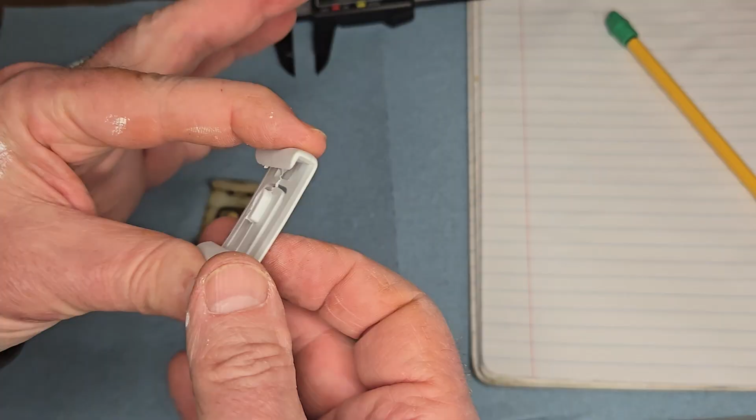But anyway, the other thing is these are extruded plastic. And when I put the other one in, it broke. It's very brittle. I don't say very brittle, but it's somewhat flexible. But in the course of putting it in, it broke. So it doesn't really make me think that it's very resilient, because obviously these are bushings that go on the bottom of the seats. You've got your body weight pushing down on this, and it's going to slide back and forth. So how resilient can something that brittle be?

So I decided that it might be a good idea for me to make a model of these and 3D print them in nylon, PA6, the nylon extruded 3D printing material, to make it a little bit more resilient. So what I'm going to cover today is how to model something in real life, get it into the computer so you have a 3D model, and then print it out. And this is a really good example.

There's a lot of people with 3D printers out there, and a lot of people who may be thinking about getting a 3D printer but aren't really familiar with modeling and how to create something in real life from a design. So what I'm going to do here is just take a real thing, and I'm going to show you how to get proper measurements and take that design from inception to creation.

All right, so first things off, you have to know where you're going to know how to get there. And in this case, 3D printers prefer millimeters. So when you're taking your measurements, it will make things a whole lot easier for you later down the line if you scrap the inches and go to millimeters straight off. I know that's confusing for a lot of Americans and maybe some imperialists over in Europe, but the unit of measure that's standard in 3D printing is millimeters, and it just works a whole lot better for you to work in that measurement.

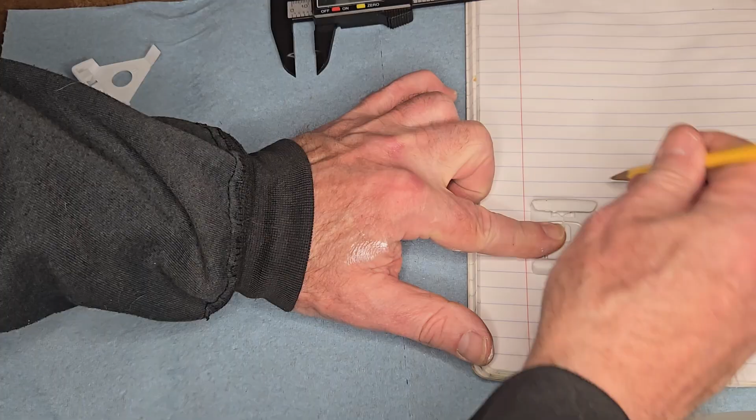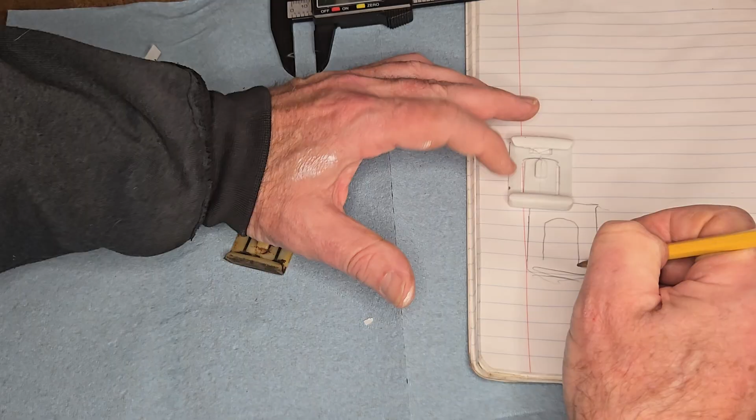And so I'm just going to transfer it on a piece of paper here, and I'm just going to sketch out the basic diagram. This is one view of it, and it has a U-shaped dealie and then a tab. It doesn't have to be perfect because you're just going to transfer these measurements, but it's going to be a good reference point for you. There's a little tab at the top up here, so you can just make a notation that there's a tab up here. Actually, it's solid, but just draw a couple of lines to denote that you can see them from here.

Okay, so that's one perspective. What's the next perspective? That would be this way, right? So if you put it so that it's right lined up, then any measurements that you put on here will transcribe onto this next layer of measurements. And you can see that basically what you've got is a square up here, and it's solid on the bottom, but it has a little hoo-ha on the top. So just capture what that looks like from here. And you can transcribe the measurements from one to the other.

The other perspective is from this direction, right? So if you lay it out like this, you can say I have a basic measurement that looks like this. It goes in a bit. The little knobby thing is like here and here.

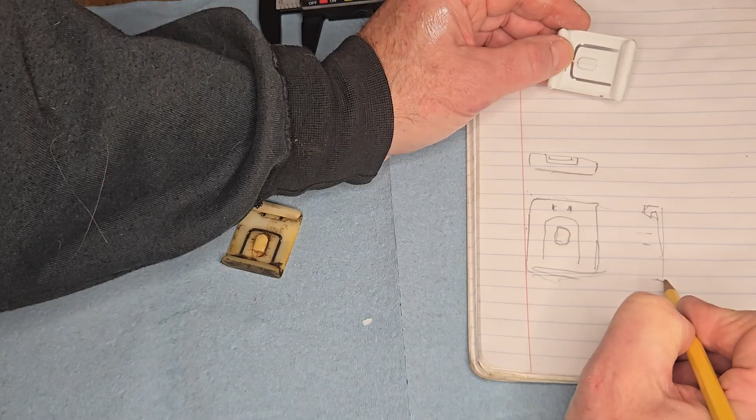So you can get an idea of what you're looking at from this perspective. There's a little knob that sticks out like this.

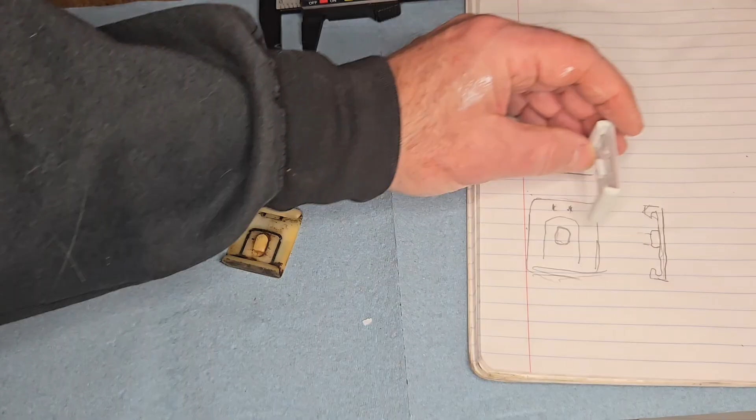All right, so what we have here is just a basic sketch, a drawing, a representation of what it's looking like in each orientation. So you have the different places where you can actually take your measurements and transcribe them onto the sketch, so that when you get into 3D space, you have your X, Y, and Z perspectives. All right, cool. So now that we got the basic layout, let's go on.

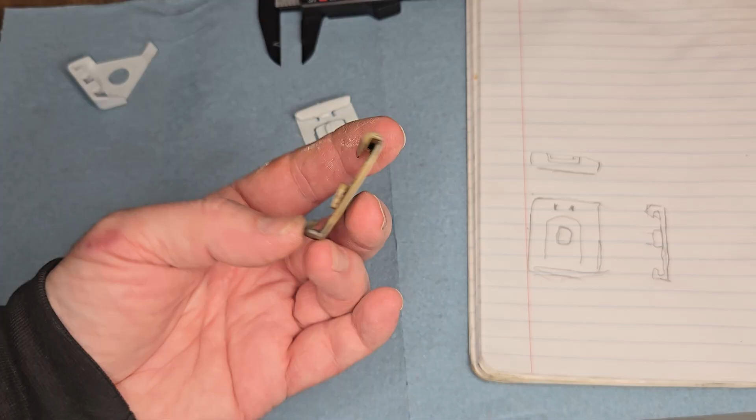This is an actual part that came out that's still somewhat serviceable, but it has the right measurements. So we're going to take our measurements off of this one, not the one that was incorrect. And to do that, we're gonna transcribe it with our caliper. This is gonna be a little time consuming, so I'll probably accelerate the video right here, but you'll get the general gist of what we're going for.

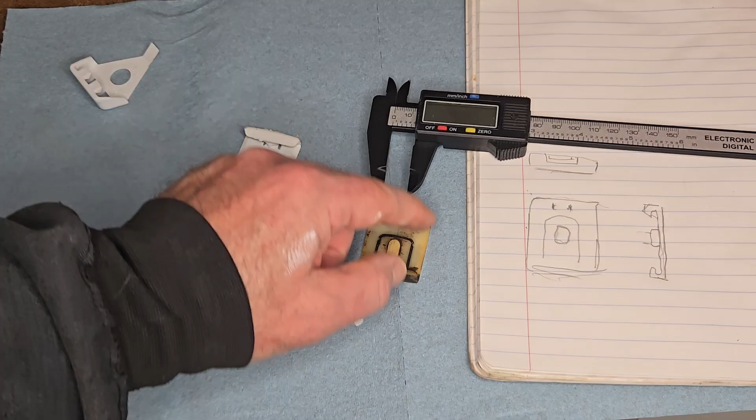We want to capture each of those measurements, the thickness, the width, where everything does what it does, so that we can transcribe that over onto here. All right, so probably speed up the video from right here.

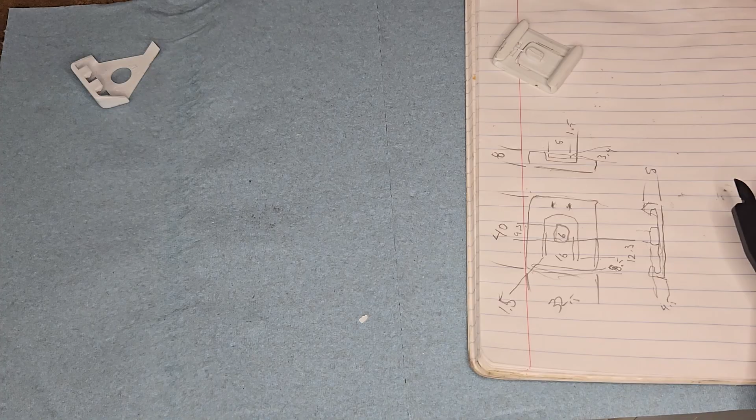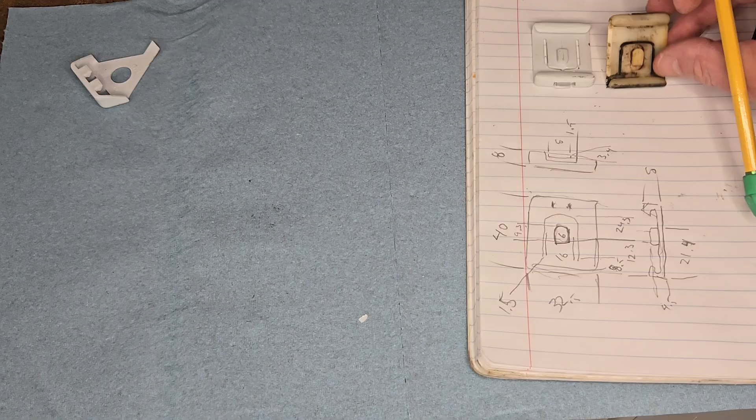Okay, I think that should do it. That's good. I captured all of the measurements that I needed from these two. The one being incorrect, and the other one being the actual OEM product that had worn out. So this should get me close and get me into the ballpark, and we'll do a prototype.

So let's jump on the computer, and I'll show you how to run through the 3D primitives that will get you where we need to be. Also, how to plan out your 3D print layers. All right, so let's move on to the computer. All right, so here we go.

This is the layout of the primitives. I'm not going to go all into the detail about how to set this up, but I will show you the method that I use to create the primitives. So it all starts off with a sketch. So here's the first sketch. And that first sketch identifies the extrusion. This is this outside sort of a C shape, right?

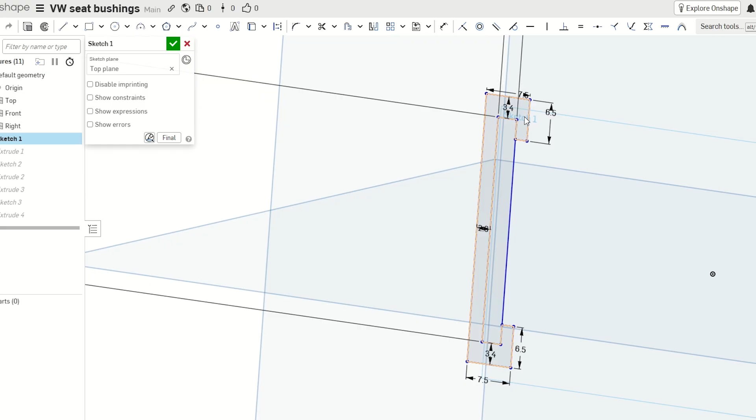And you take the dimensions that you took off of your measurements back in the workshop with the component, and you transcribe them into here, and you make just a shape, a polygon, right? And then you can extrude that polygon into this first extrusion. You can see it comes out this direction right here. Here's the other side of that shape. You just tell it how far that you need it to go.

And once you have that, you need to make another sketch to make the cutouts that go on the inside. So you pick this face of the extrusion that you just made. That becomes your platform for the second sketch. And here's the second sketch. You can see I outlined, in this case, what I'm going to cut out and what I'm going to extrude out.

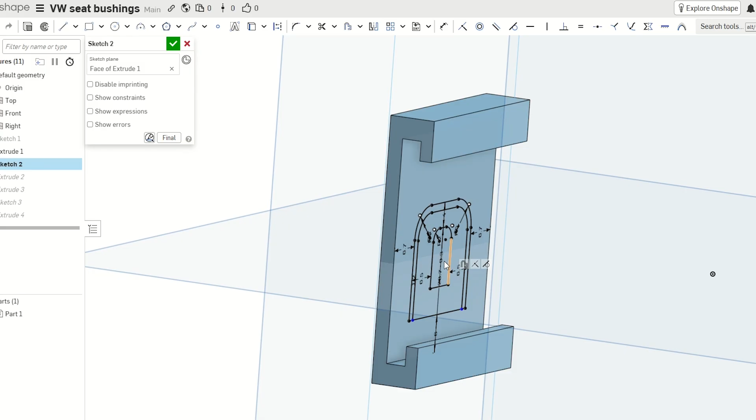So this outside edge becomes a cutout, and this inside becomes an extrusion that extends out. And you can see that once you cut it out and then extend it, that's what it looks like. You're subtracting or adding to the shape by using extrusions that come off of a sketch.

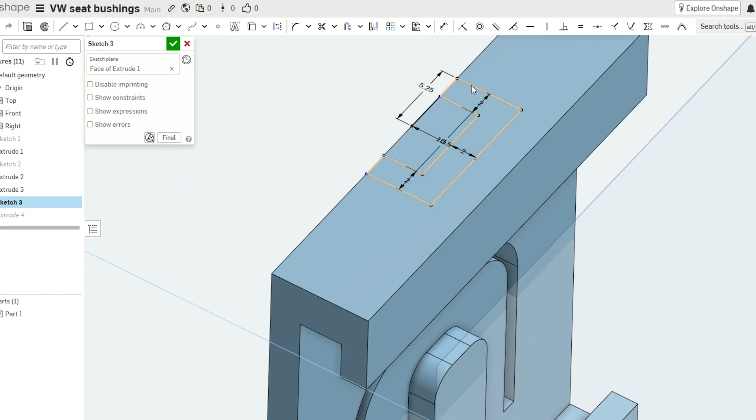And then the last thing is the little notch at the top, and you can see sketch number 3, same concept. You use this face of that extrusion, and you just outline what it is that you want to do, and then you can do your extrusion, and it cuts out. In this case, this is a C shape that is an extrusion that cuts 7 millimeters deep. It creates this little tab right there.

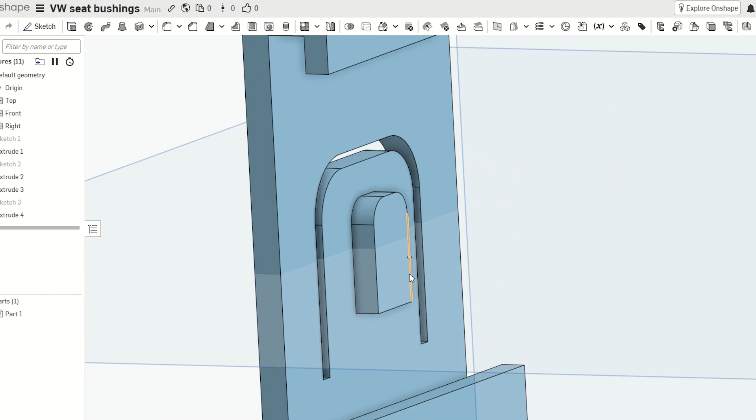And again, this bottom piece down here makes this little tab that's going to be kind of springy, and it will hold it into place. So this is a rough edge. This is the rough 3D block.

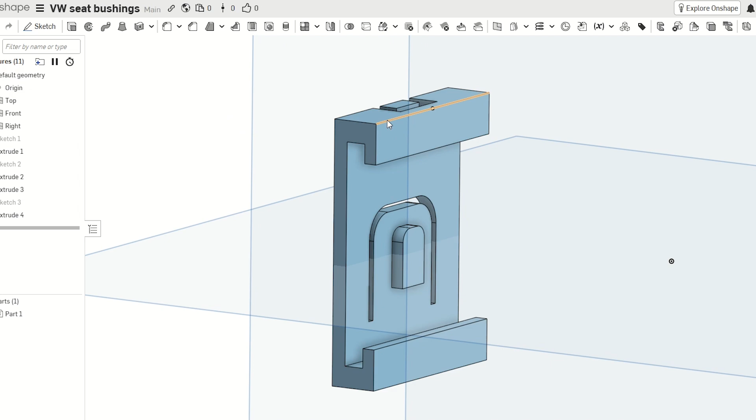If you recall, on the finished product, it had rounded edges, and you don't have to really work on going down to the sketch level to make your rounded edges. You can work with square blocks and then use the tools that come in your CAD software. In this case, I'm using Onshape, and I'm going to pick an edge. Like, I'll take this edge right up here, and I'm going to tell it to round it.

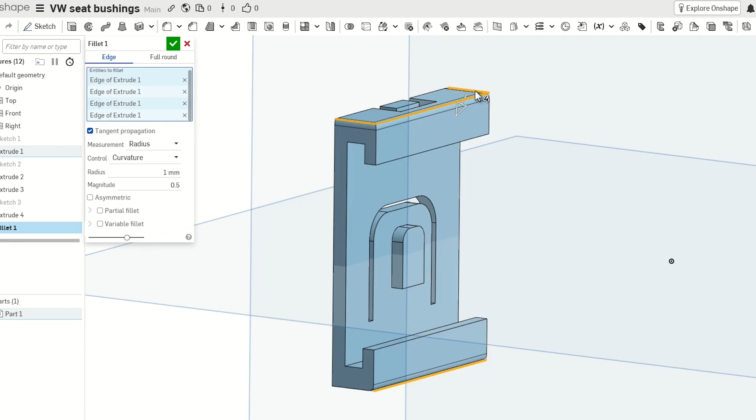See how I can round it? But I'm not going to make it a 5 millimeter radius. Let's just go see what a 1 millimeter radius looks like. That looks pretty good. We'll do the same thing down here, and on here, on here, and on here, on here. Real easy to make these things nice and rounded.

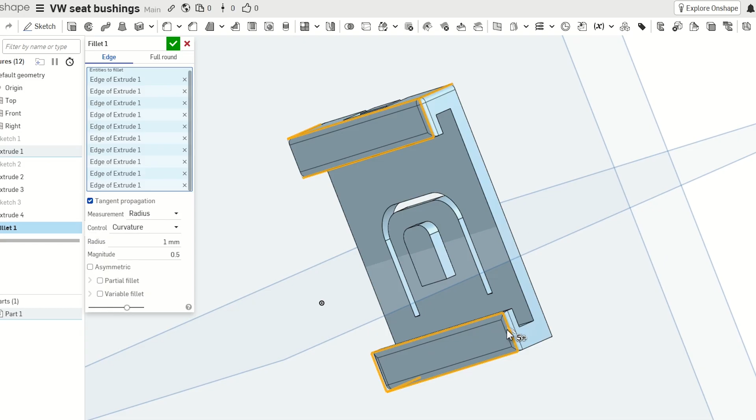Whoops. Didn't want to do that. You can just hit Control Z and undo what you're doing. And then we'll flip to the other side. Around this edge. Around this edge. This edge. I think we got everything rounded. Whoops, we got to round this edge right here.

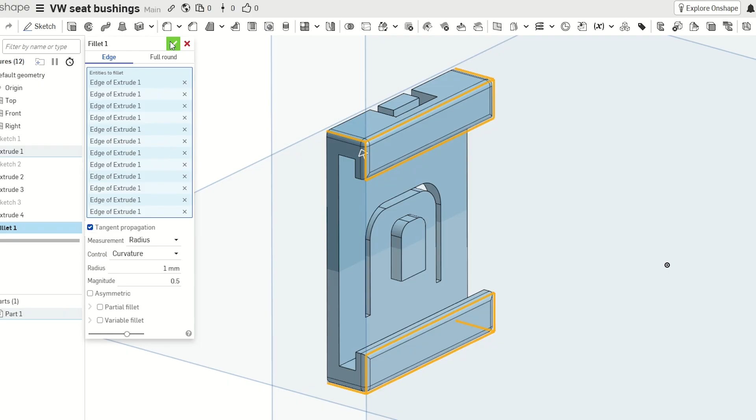There we go. That's pretty much what we're going to print out in 3D. So let's talk about 3D planning. So I'm going to go ahead and commit these changes. This is our product that we're going to generate. It's pretty close to what they got going on. I'm happy with that.

The 3D planning is all about layers and layer separation. When you 3D print something, it gets laid down in lines of filament, and as the filament extrudes, those lines become layers, and they layer up, right? And the really big strength problem that you have with 3D printing is the layer separation is not near as strong as the tensile strength.

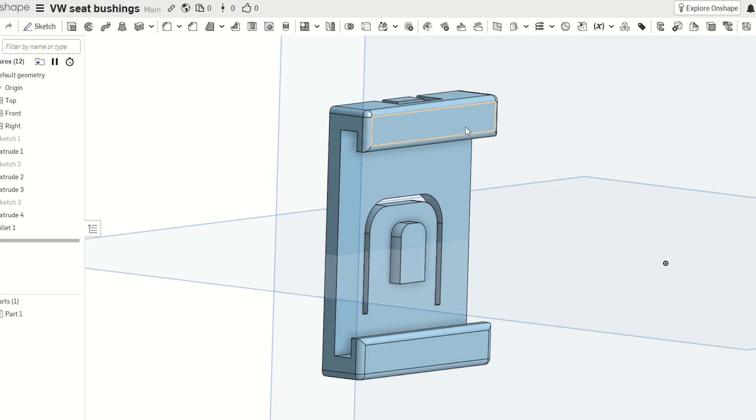And so when you're looking at this part in particular, if I laid it like this and started printing from the bottom and going up like this, and I put my layers like that, this tab right here that's expected to bend back and forth, that would be bending on a layer line, and we don't want to do that, right? So probably the best method that we're looking for on here, because the shear strength and the tensile strength for this particular part, we want the layers to be oriented.

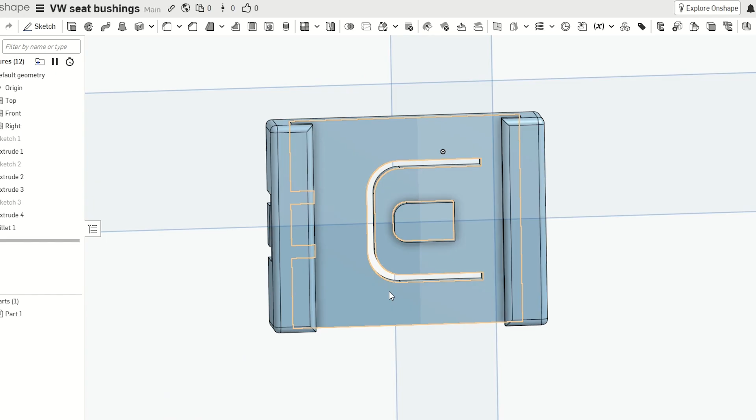Let me set it like this. So we want the layers to form from the side to go up like this, and we'll go zip, zip, zip, zip, zip like that. We'll set some support so that these grooves can get supported, and then we'll see what we can get out of that nylon. So let's go ahead and lay this thing out for printing.

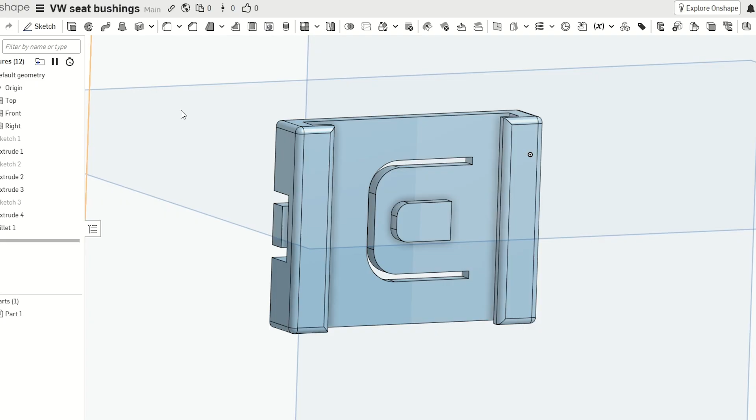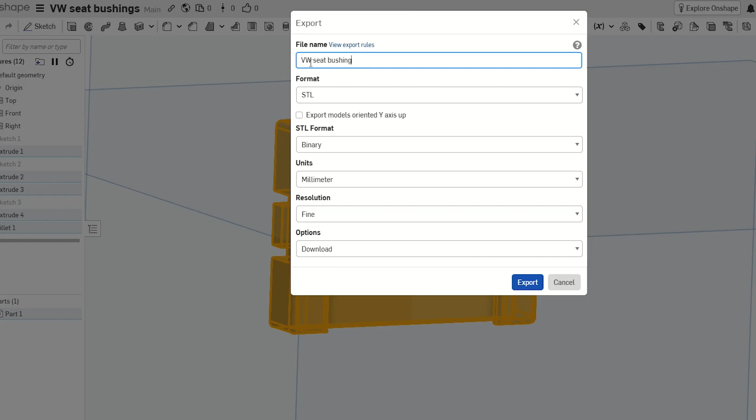Now, one of the things I like about Onshape is how easy it is to create an STL file. So here's our graphic. It's designed in millimeters. All we need to do to make an STL file to send to our slicer is pick the entire part, right click on it, and tell it to export. And I can tell it in STL format. I'm going to call this VW seat bushing. And then we'll send that to the slicer.

I'll go ahead and slice this up. We'll get it set up. This video is not necessarily about running a 3D printer. This is about modeling a part from in your hand to real space, through the 3D printing process. But I'm not going to go into setting up the 3D printer or doing a lot of this other design work. That's a whole nother video. So I'll go ahead and take that STL file and run it through the slicer and then we'll get it into the machine.

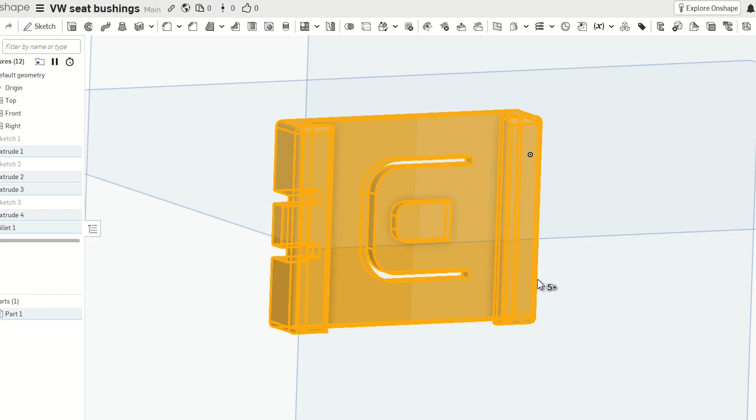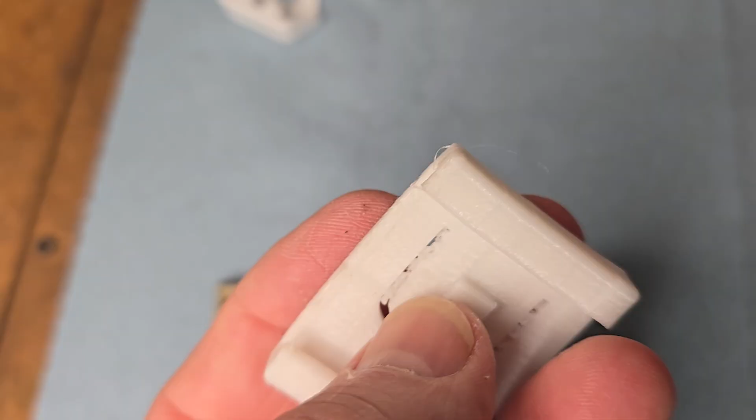All right, and there you go. That's the product right off the printer. Now I still need to clean up some of this support material and do a sizing and make sure everything works the way that it's supposed to work. But when you lay it up against this, the OEM over here, it looks very, very similar. Now this is a little shorter because it's worn down, but you compare that to the one that I got from J-Bugs, which is just plastic.

This is really flexible. And like I said, the one that I already put in there had already broken once. So this material is not nearly as resilient as this nylon is here. This little clip on the nylon, you can see it does actually bend. Let's see if I can do it with one hand. So it does flex the way that it's supposed to. It's a little more rigid. It's a tougher material. You can feel it in your hand. It's more substantial.

So anyway, this is the original OEM. This is the cheap knockoff that is incorrect because you can see the location. Whoops, got it upside down here. The location of that tab was wrong, and what I had to do is actually cut a portion of the tab off in order to get these to work. So these are unacceptable from my standards anyway. So this is my new solution, and we'll print a couple more of those out, and we'll do some tests in the car and make sure everything functions. But I think we got a good solution.